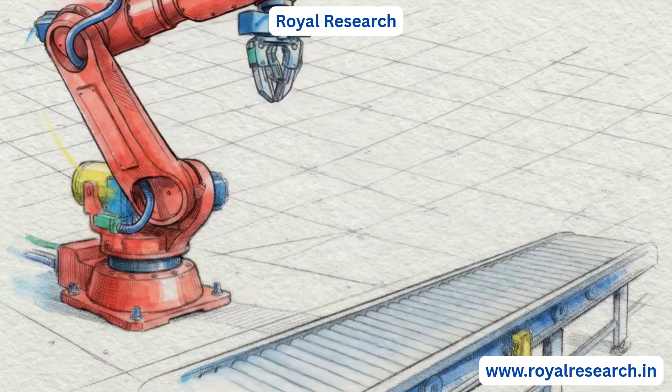Industrial automation requires serious capital. Integrating a new robot into your facility is a massive financial bet on efficiency. But according to our partners at Royal Research, the most common point of failure in automation upgrades isn't actually bad hardware. The failure almost always stems from mismatched specifications.

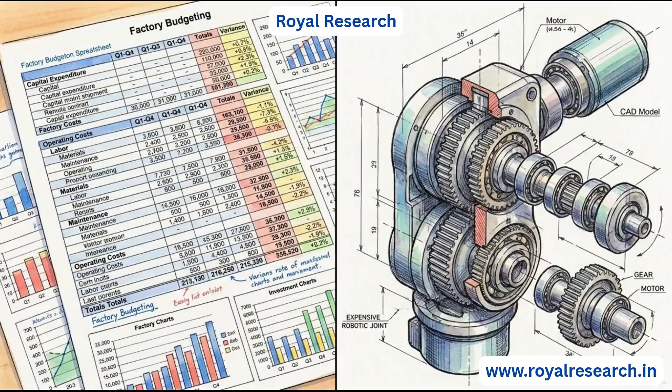This creates a strict capital expenditure dilemma. If you underspecify a machine, you introduce immediate operational bottlenecks that drag down your entire line. If you overspecify, you waste your budget on capabilities you don't need and complicate the integration process.

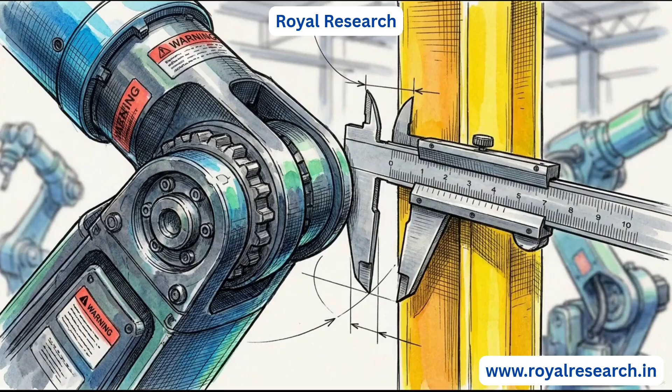Selecting an industrial robot is rarely about finding the best machine on the market. Instead, it is an exercise in ruthless constraint matching. To navigate this, we have to look past the marketing and understand which exact specifications directly dictate the output and physical constraints of your floor.

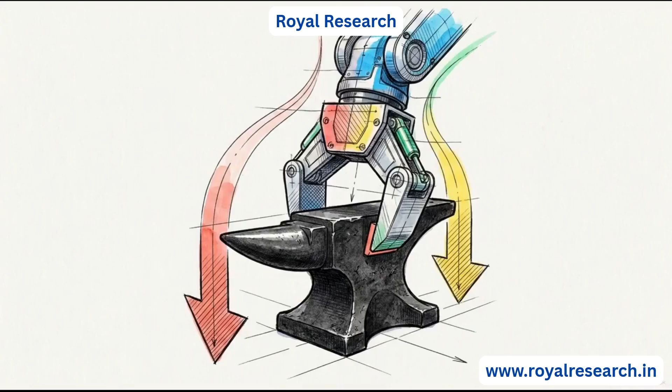Evaluation comes down to 4 core pillars. First is reach, next is payload, then degrees of freedom, and finally controllers.

Here is the problem. Relying purely on the simplistic top-line numbers printed on a manufacturer's brochure sets your operation up for failure. A static number printed on a page simply cannot account for the harsh, dynamic realities of a fast-paced production environment. Evaluating these 4 technical specs strictly through the lens of your real-world workspace constraints is the only reliable way to guarantee a solid return on your investment.

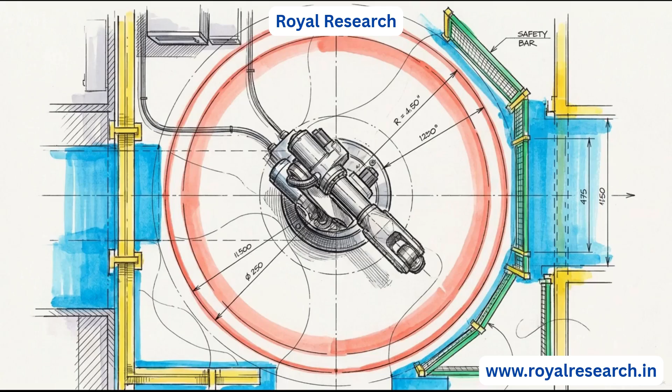Let's start with reach. This is the absolute maximum distance a robotic arm can extend to perform a task. Because it dictates the layout of your entire surrounding workspace, reach directly impacts your floor plan. Buying a robot with the exact minimum reach required for your current task saves floor space and initial capital.

But there is a sharp trade-off. You leave yourself zero margin for error. If your workspace geometry changes even slightly, your robot becomes obsolete.

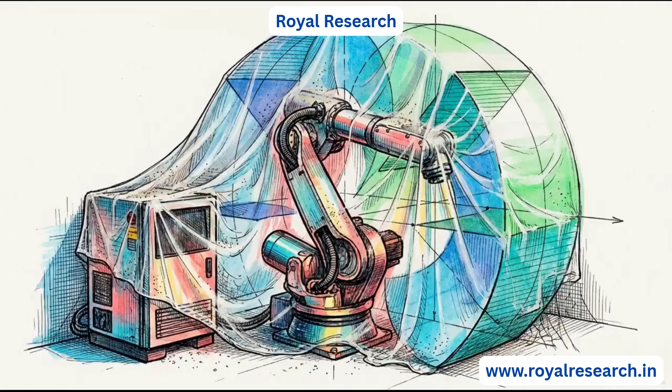When you exceed a robot's true functional capacity, the physical consequences are severe. You will see decreased accuracy, accelerated wear on the motors, and premature mechanical failure. Real-world geometry and tooling gravity dictate your reach and payload requirements. Isolated brochure numbers are functionally useless without that context.

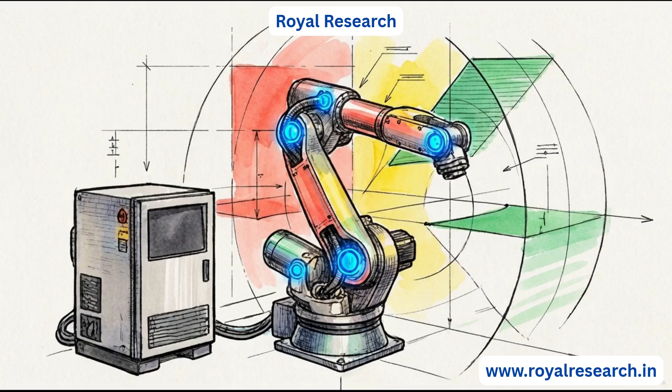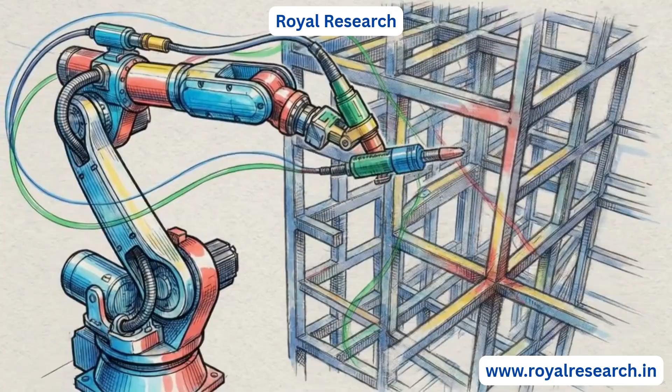Next, we evaluate degrees of freedom, or DOF. This metric links directly to the number of mechanical joints, or axes, a robot possesses. Higher degrees of freedom allow for extreme flexibility. A multi-axis arm can snake through confined spaces and maneuver tools into complex, intricate metal structures.

While they allow for these intricate maneuvers, high DOF systems come with a harsh trade-off. They often introduce higher hardware costs and significant programming complexity for your engineering team. For simple, unconstrained pick-and-place applications, a 6-axis system is total overkill. You are paying for agility you won't use while driving up your integration time.

Managing those movements requires the robot's brain, the controller. The controller handles internal operations and dictates how the machine interacts with your external factory systems. Modern controllers offer deep software customization and advanced programming capabilities.

The trade-off here is human capital. These systems demand a steep learning curve from legacy engineering teams who have to maintain them. You must prioritize controller compatibility with your existing infrastructure. If the software protocols don't match, your expensive new robot becomes an isolated data silo on the factory floor, unable to talk to the rest of your production line.

Matching the exact degrees of freedom and controller type to your specific task's complexity prevents you from paying a premium for capabilities you will never utilize.

This brings us to the core integrator's problem. How do you test the limits of your reach, payload, DOF, and controller requirements before spending a single dollar of capital? The answer is a digital proving ground.

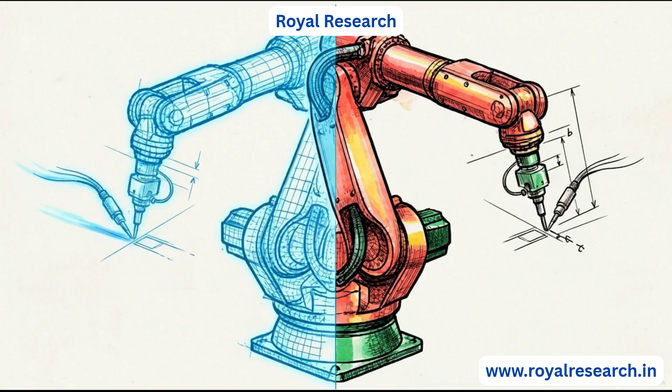Inside that digital environment, you can safely identify reach limitations and distribution challenges that spec sheets try to hide. Your process engineers can also evaluate critical performance metrics, like cycle speed and energy consumption, under realistic operational conditions. The upfront time invested in a RoboDK simulation provides the data-driven connection between early planning and final hardware integration, resolving the trade-off between planning time and downstream retrofit costs.

Consider User Profile A, the simple integrator. This type of operation handles basic, highly repetitive applications like end-of-line palletizing. Because their environment is unconstrained, their exact priority is maximizing payload capacity and ensuring simple controller integration. They should actively avoid spending budget on high degrees of freedom.

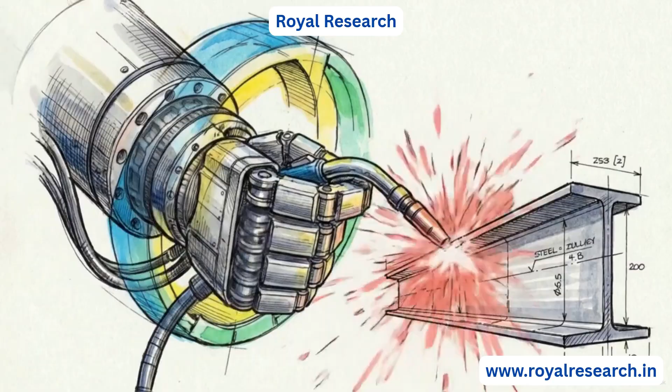Contrast that with User Profile B, the constrained operator. This team is managing complex manipulation, like internal welding, within tight, restrictive environments. Their priority flips. They must max out their budget on higher degrees of freedom and advanced controllers to handle the programming complexity. For them, maximum raw reach is secondary to pure joint flexibility.

Optimizing your automation pipeline is about categorizing your operational environment first, and then buying exactly what that category dictates, nothing more. There is a definitive, non-negotiable rule in industrial procurement: you never guess on specifications.

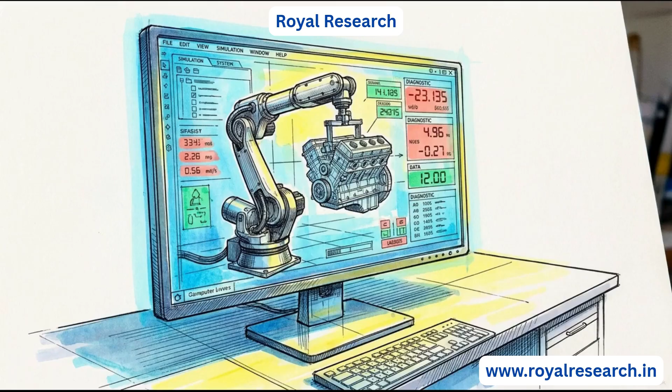Filter your hardware options through a library like RoboDK. Run the exact simulation against your real-world payload and reach constraints, and let the hard data from that test dictate your purchase order. We focus on this because objective, data-driven decisions will always outperform a manufacturer's marketing promises.